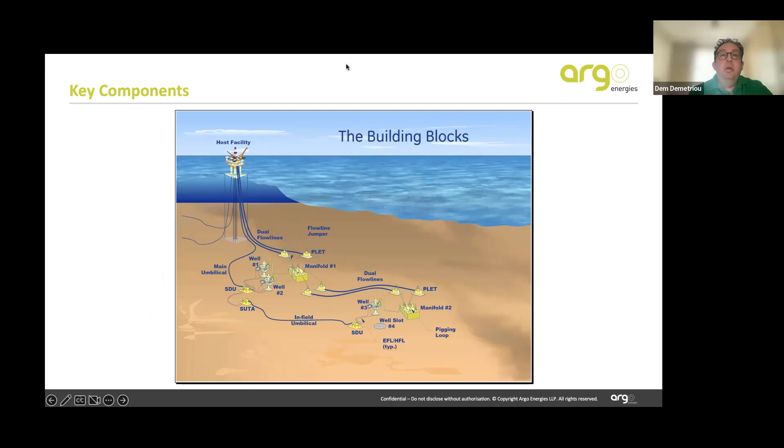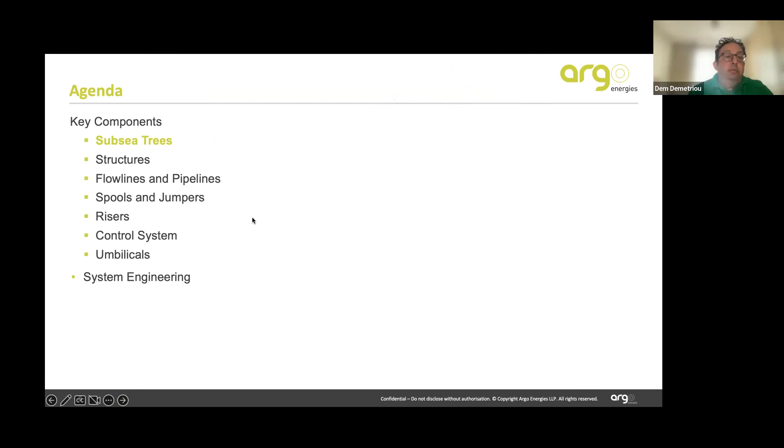So the first component we're going to look at are the subsea trees. The primary function of the subsea tree is to control the production of hydrocarbons, be it oil or gas, and monitor those from the subsea well.

The Christmas tree also allows you to access the well if necessary. It also needs to have injection points for chemicals, such as a corrosion inhibitor, scale inhibitor, or methanol for hydrate inhibition. So all this functionality needs to be accommodated by the Christmas tree. Here you can see a typical Christmas tree with an ROV interface panel, so the ROV can actually access and operate the valves on the Christmas tree from this panel.

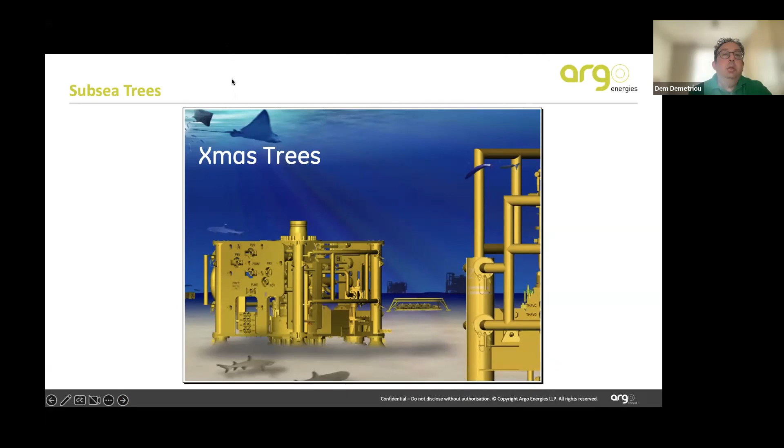Excuse me, Dem, maybe turn off your video because you're breaking up occasionally. Hopefully that'll help with your bandwidth. Not sure, but we'll give it a try. Stop video. Is that better? So far, okay good, sorry about that. That's all right.

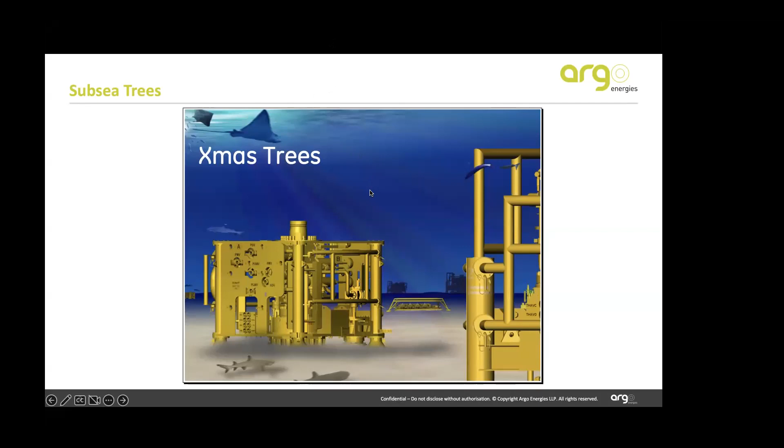So we're going to look at the two main types of Christmas tree: the horizontal Christmas tree and the vertical Christmas tree. The main difference between the trees is the arrangement of the valves. The vertical Christmas tree is the original, developed from land Christmas trees, onshore Christmas trees, so these have all the valves in a vertical arrangement.

If you need to do some kind of maintenance to the tubing hanger or wellhead, you need to access the tree through this bore, using some kind of means of access. The horizontal Christmas trees were developed a little later, and instead of having the valves stacked up vertically, some of the valves are moved horizontally. This allows easier access to the tubing, so you can retrieve the tubing hanger and carry out maintenance on the wells without the valves being in the way, because they're stacked sideways. It's a bit of an operator preference as to which tree is used.

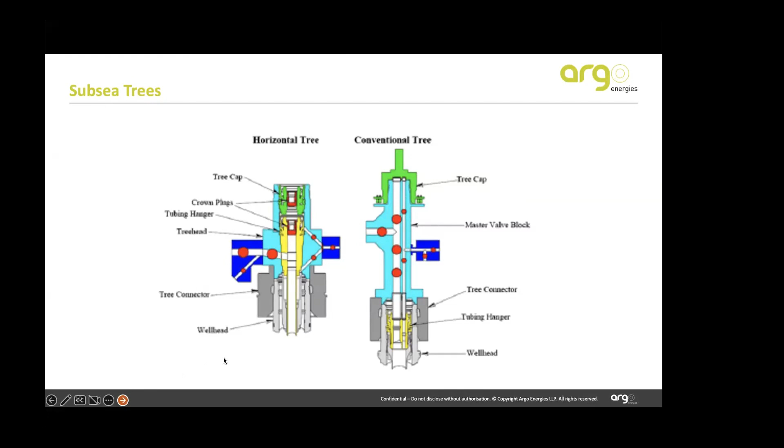Looking at it from a production point of view, a P&ID point of view - this is the same horizontal tree we had before, and this is the P&ID, the process description, to help you understand it a little better. So we'll have some DHPTs, downhole pressure and temperature gauges, which allow us to monitor the well.

SSSV, subsurface safety valve - this is the valve that's set to shut in the well if there are any major operational issues. We have two sides to the Christmas tree: in green we're showing the production side, and in purple is the annulus side. The annulus allows you to have access into the main bore if required.

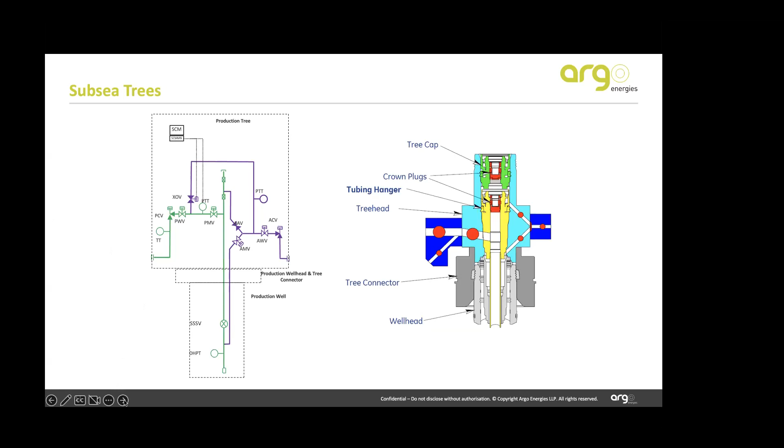So the next component I want to look at are the various subsea structures - we're talking about the various manifold systems. Here you can see this is our well, tied back with a number of wells, to some kind of manifold. A manifold gathers flows from the different wells, to commingle flows if necessary. Sometimes it has pigging functionality to allow round trip pigging, so there may be a pigging loop contained in the manifold.

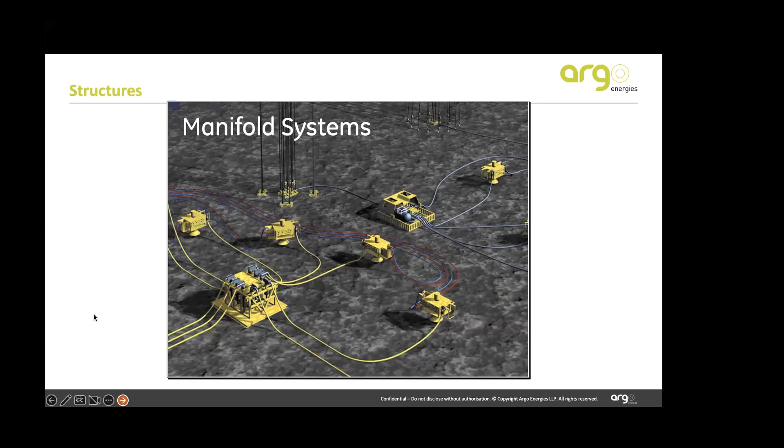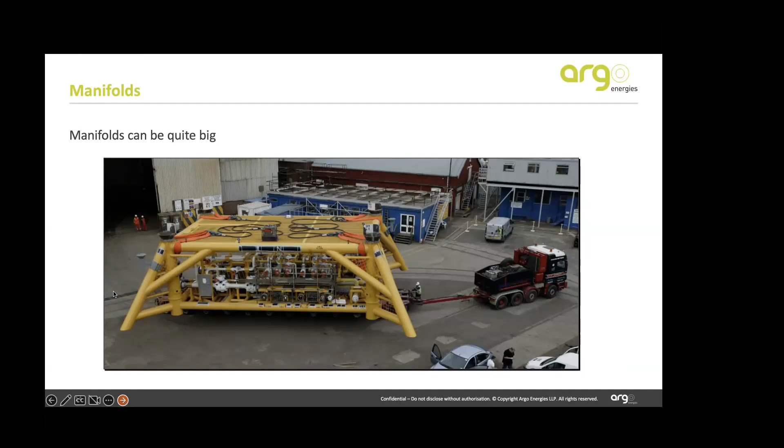Templates are slightly different to manifolds. Templates have the capability to drill through them. The templates are set on the seabed, you drill through the template, and the Christmas trees will be installed within the template as well, and they will have the same...

This is, I believe, the same as this one - this is the Ormen Lange template, which was installed in Norway, in about 900 meters water depth. It's about 1,100 tons, about 44 meters by 33 meters, and about 15 meters high. This is one of the largest templates ever installed - real massive beasts.

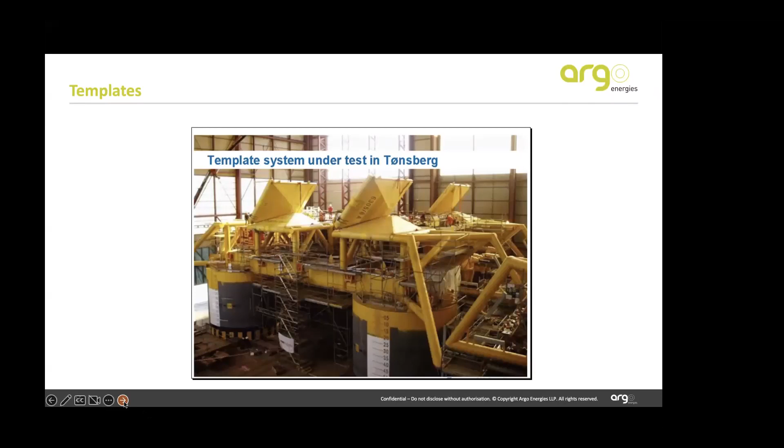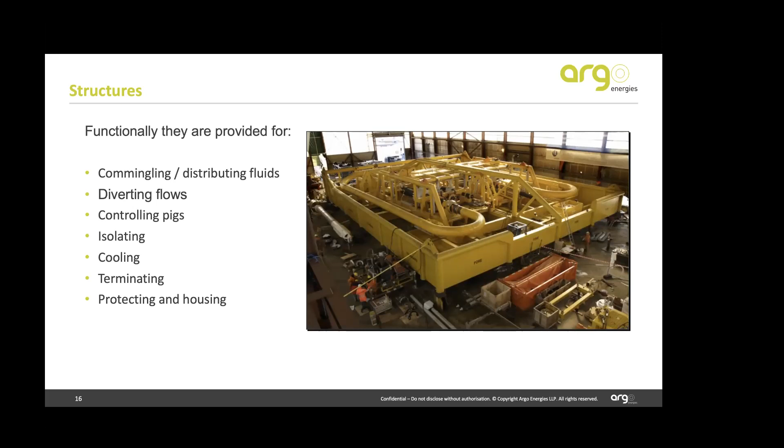The functionality, as I said, is for commingling, distributing fluids, diverting flows, controlling pigs if necessary - here you can see this has a loop that you can potentially use for pigging or recirculating flow. It can also be used for providing isolation, so you can shut off different wells if you have actuated or even manually operated ROV operated valves in the structure. It can be used for cooling the fluids, and also for protection and housing of the Christmas trees.

A bit about terminology - manifolds or templates. Some people get these confused. Templates locate and house wellheads and trees - that's the fundamental difference. A template will include the wellhead and the tree, whereas the manifold won't include the wellhead and the tree.

The templates usually include some manifolding pipework, and they are installed before drilling commences. That gives you some schedule constraints, in that you have to design and build the template before you can start drilling. And as you can see by the size, they often need heavy lift vessels to install them.

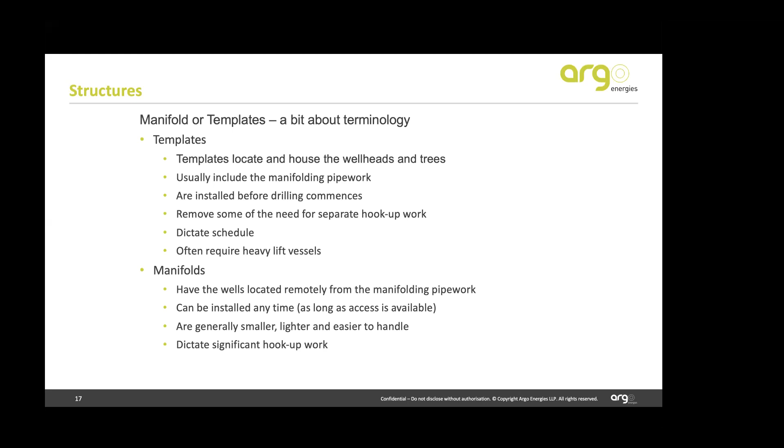Manifolds can be installed at any time. They're generally smaller, lighter, and easy to handle. You can have wells remotely located from the manifold, but the disadvantage is significant hookup work - we have to connect each well to a manifold. So if we're drilling lots of wells from the same location, the template might be a good idea. If we have to drill wells around the field because of the nature of the field, then we have to connect them back to a manifold.

They can be fishing friendly, over-trawlable, or neither. Over-trawlable means that the fishing gear must be allowed to go over and not interfere - this follows the NORSOK Norwegian standard, and should include members that deflect to allow fishing interaction. Flat-sided structures are acceptable where there's no fishing - for example, if you're under an FPSO, there's unlikely to be fishing, so you can have a flat-sided structure.

This is an example of a GFRP protection structure. This actually sits over a tree, I believe, but it gives you an idea of the design necessary for a fishing-friendly or over-trawlable structure.

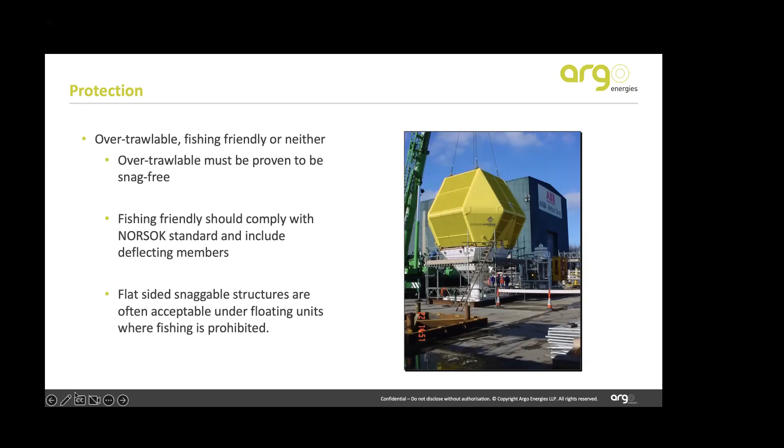Moving on from structures, the next component are our flow lines and pipelines. There's some confusion in terminology, and people use these terms interchangeably. Flow lines or infield lines are between a manifold and a host, or between manifolds, or within the same area. They're typically smaller diameter with multi-phase production, whereas pipelines usually refer to an export line carrying processed fluid, so processed gas or processed oil, usually coming from a platform or facility and going to shore. Sometimes also referred to as a trunk line, but it's not a very big deal - these are just the strict definitions.

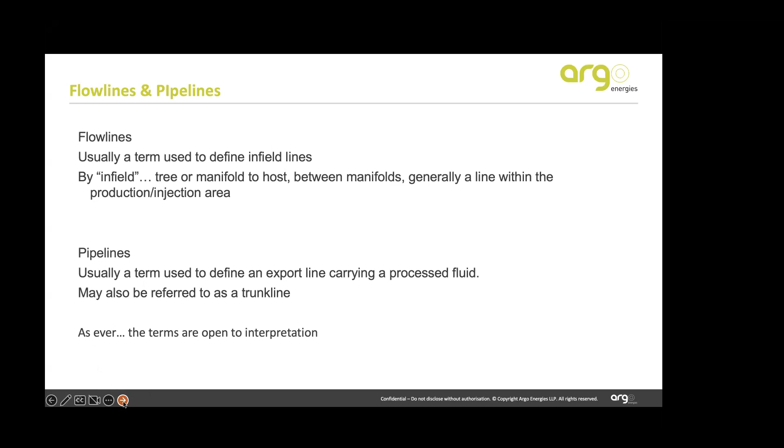Our flow lines or pipelines can be made from a number of different materials and in different configurations. We can have a conventional steel pipe, or we can use clad pipes - this is where we have a carbon steel pipe with a clad layer of corrosion-resistant alloy to improve corrosion resistance and performance. We can also have non-bonded flexible pipes.

This is non-bonded flexible pipe, consisting of a series of different layers - you can see here a wire armor with polyethylene, and then a series of wire armor wound in different directions to give strength in bending and also in pressure containment. Then there's an outer protective sheath, usually in polyethylene or polypropylene or some other suitable material. Non-bonded pipe, or flexible pipe as it's sometimes known, is used quite often.

Disadvantages are they're only available in smaller diameters and have diameter, temperature and water depth limitations depending on the manufacturer. We can install pipe as a piggyback, where we have a smaller diameter line installed strapped to the back of a larger diameter line, or we can also install what's known as bundles.

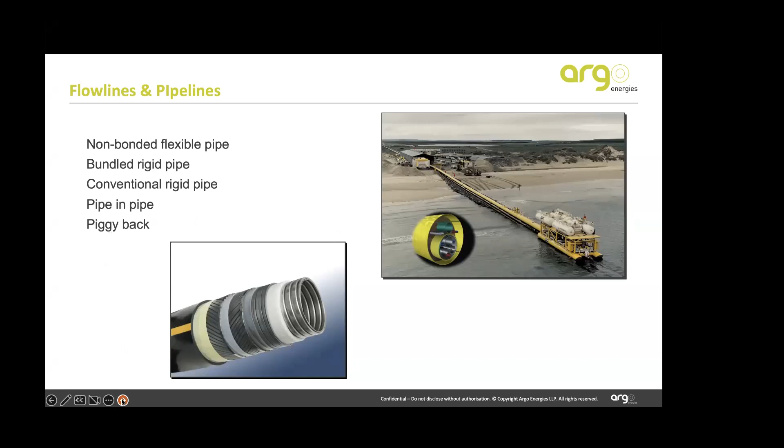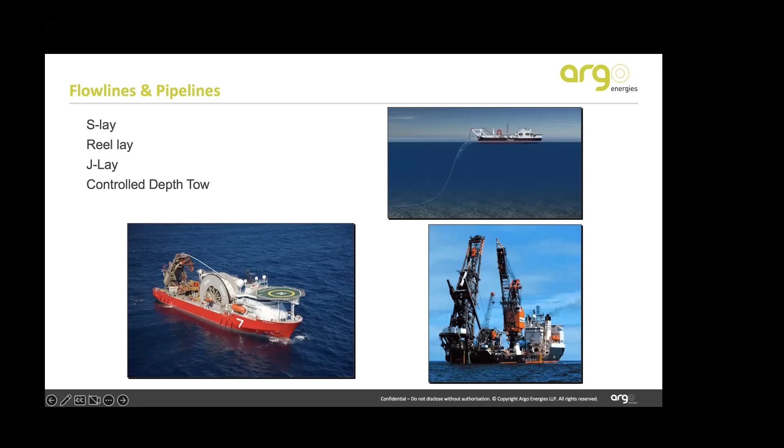Two other acronyms to watch out for: plets and plems. Again, sometimes used interchangeably, but pipeline end terminations and pipeline end manifolds. Pipeline end terminations are installed on the end of the pipeline, as the name implies, and they're usually used for deep water developments, there to host a diverless connector hub. So we need to connect the end of the pipeline to something, and the pipeline end termination will have that connector in place. It's installed during the installation operation as part of the pipeline. It's touched down on the seabed, and then we can use that to connect to the tree or wherever we're going.

The plet is typically very simple, it just has a connector, whereas a plem can be more complicated. It can include connections to other facilities. It might include provision for pre-commissioning activities such as pigging, dewatering, and it's generally installed as an independent structure because it's a bit bigger and a bit heavier. But sometimes, again, these are used interchangeably, so just something to be aware of.

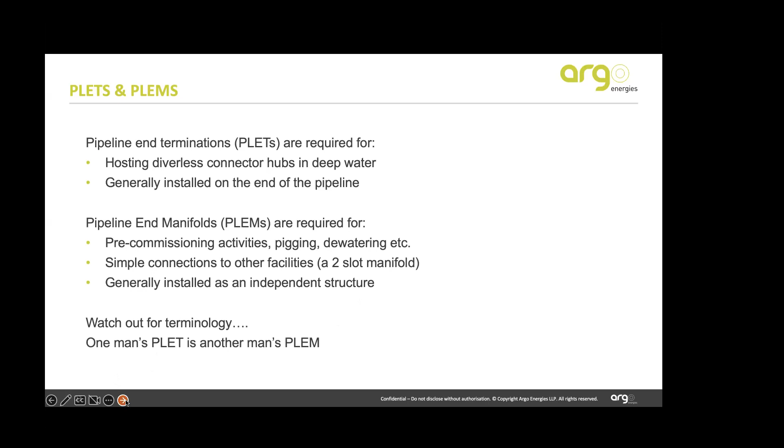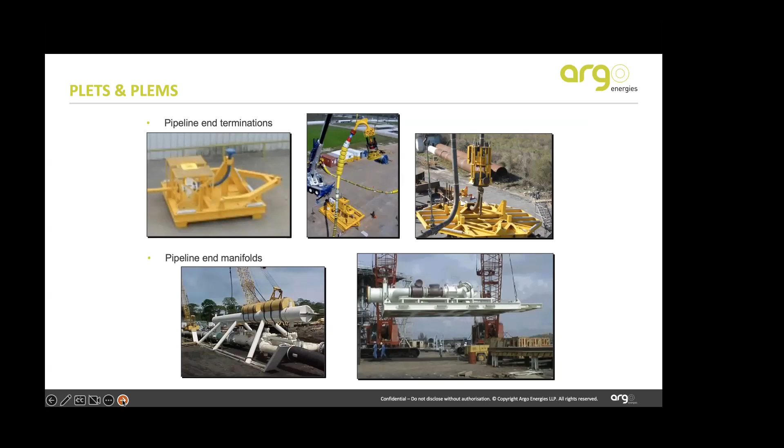So spools and jumpers, very brief. Spools and jumpers basically connect the components together. They can either be diver installed or they can be diverless. Obviously, in deep water, they will be diverless, so that makes things a little bit more complicated in that we have to have these kind of diverless connections.

And then we need to decide whether the spools or jumpers will be vertical or horizontal. They may have odd shapes because they need to accommodate thermal expansion, installation tolerances, misalignments, connector alignments. So they need to be designed to accommodate the various forces we will see, so that they don't transfer loads onto the equipment.

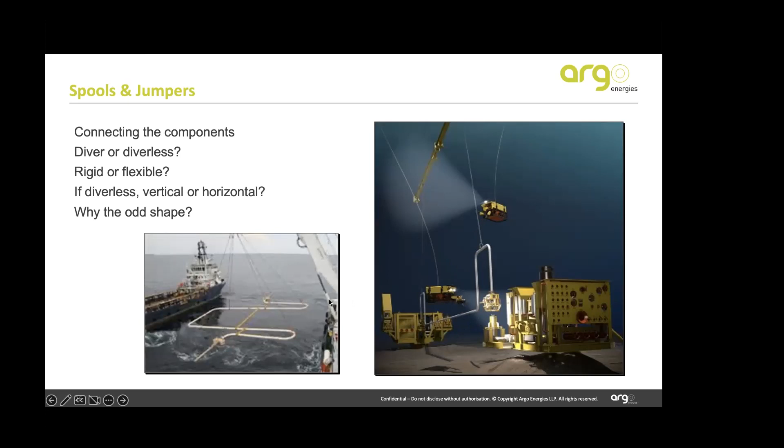Risers, so there are lots and lots of different types of risers. Risers can be rigid, so rigid platform risers. They can be flexible, made with the flexible type that I mentioned before, particularly suited for large diameter deep water FPSO developments, or they can be hybrid risers.

So again, we need to bear this in mind when we're setting out our field layout. Where do we install our end terminations, our riser bases, our flow lines? How do we design this architecture in relation to our wells?

So I'm just going to go and come back.

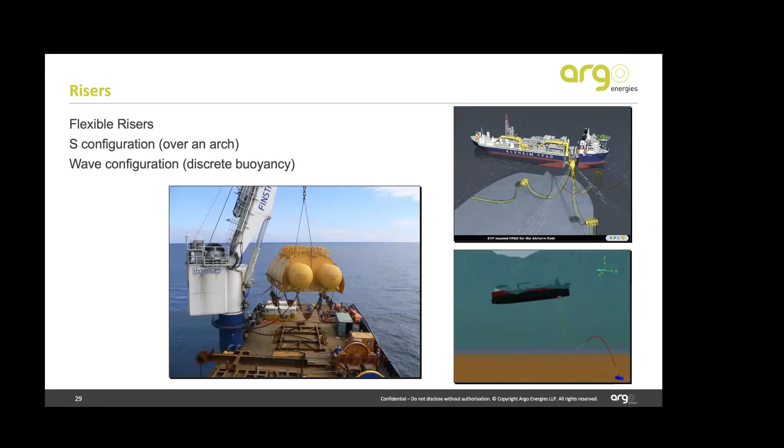So the wave configuration is maintained by having discrete buoyancy elements attached to it. The red section here will be an area where there is some buoyancy attached, so it maintains this configuration. The choice between these kinds of configurations will be dependent on things like water depth, environmental conditions, number of risers, and interaction with neighbouring risers, etc.

Going back to this one, this is a hybrid configuration that was used on the Girasol project in West Africa. This has rigid risers which are tethered to the seabed some distance away from the FPSO, and then from the top of this rigid riser, there's a flexible that connects from there to the FPSO. This is quite a unique hybrid solution that was used in deep water.

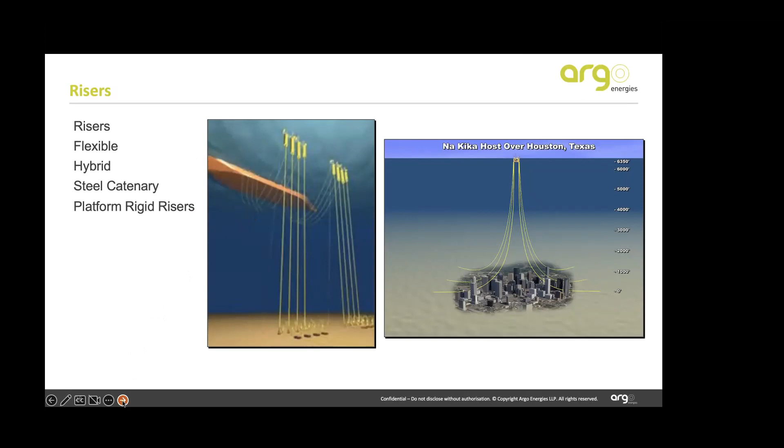Platform risers are reasonably straightforward. If we're building a new platform, we can design the riser and install it during construction of the jacket, and it gets loaded out with the jacket.

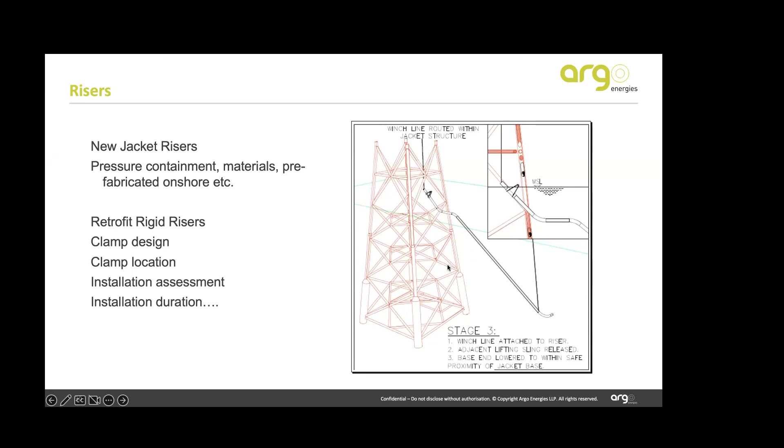The next area to look at is the control system. We've got all this equipment on the seabed, but without a control system, it's kind of effectively dumb. We need to have some way of opening and closing valves on demand, and closing valves in an emergency. If there's some kind of emergency condition, either with our field or an adjacent field, or some issue on the host, then we need to be able to close the valves.

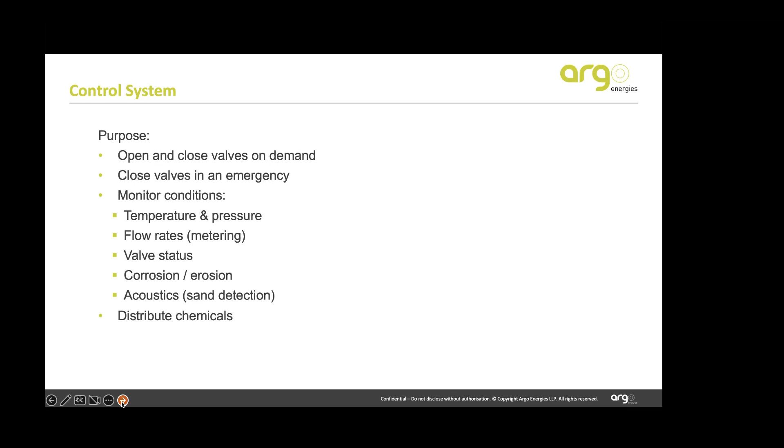We also need to be able to monitor things like pressure, temperature, flow rates, corrosion, erosion, and the status of the valves. The control system also needs to distribute chemicals to the wells or to the flowlines in the field, so it's important that these are designed appropriately. There are lots of different types of control system.

Most modern control systems, most modern fields, have what's known as a multiplex electro-hydraulic control system. We use hydraulics for the valves. This can be used for long lengths, hundreds of kilometers. Umbilicals are small - so even for quite a complex system, the umbilical diameter might be maybe 6, 8, 10-inch diameter, so not really a very large size.

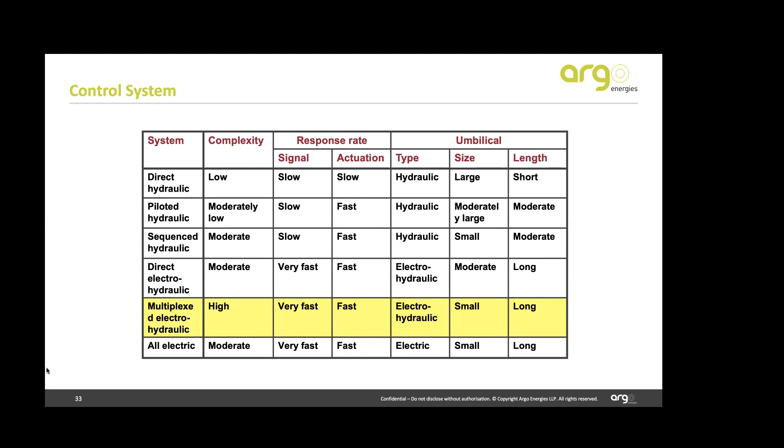There are lots of other components of the subsea control system. Some of those components are on the topsides, on the host. You will typically have a hydraulic power unit and an electrical power unit, providing, as the names imply, hydraulic and electrical power to the system. There'll also be an MCS, the master control station - a computer terminal in the control room. These are all interfaced to a topsides junction box, sometimes known as a topsides umbilical termination assembly or topsides umbilical termination unit, TUTA or TUTU are the names you might hear.

From the topsides junction box, the electro-hydraulic control umbilical is connected to the subsea umbilical termination, or subsea distribution unit, as we saw earlier. The cores are split out, so the electrical and the hydraulics are split. We connect these to a subsea control module, SCM, which sits on a mounting base, sometimes, not always. And in there is an SEM, subsea electronics module - this is the electronic brains.

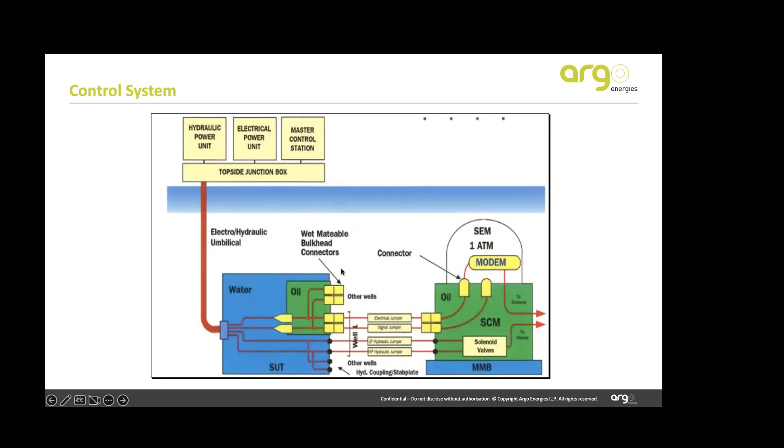So just to finish up, looking at the umbilical. The umbilical links up all the control system components. It distributes hydraulic fluid, transfers power and signal, and supplies chemicals for injection.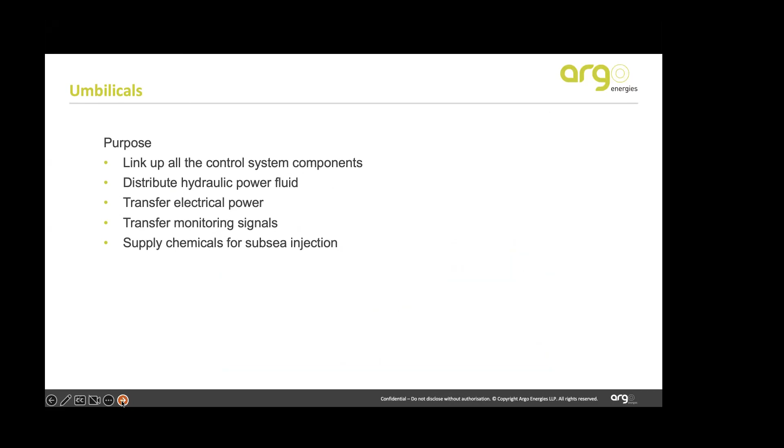Here's a typical cross-section of an umbilical. So what can we see here? Umbilicals can either have thermoplastic hoses or steel tubes within them. Typically, steel tubes are used for deeper water applications because of their better resistance to external pressure.

Here you can see the various hoses within there. These are the main hoses. You've got some other hoses here, and you can also see the electrical cores here.

Typically we'll have high pressure and low pressure hydraulics with dual redundancy. We'll have electronic, copper, and fiber optics within the umbilicals recently. So you've got these cores. Sometimes they'll have fillers within there made of lead or some other material to add weight.

And then we've got this armoring around here to give resistance and strength. Finally, an outer sheath of something like polyethylene to provide mechanical handling resistance. Quite often we'll have some spare cores within the umbilical as well to make sure that if something is damaged, we can carry on operating.

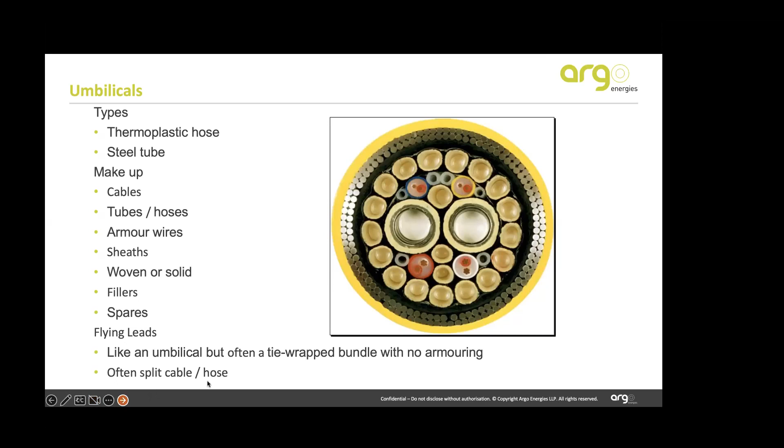For umbilical installation, we can either, as with reel lay, take them out on a large reel to site and install them, or for larger diameter umbilicals, use a vessel that has a carousel. A reel is a vertical hub, whereas a carousel is horizontal, usually within the hold of a ship, so you can take a lot longer lengths.

Typically you might want to bury your umbilicals, so you can install them within a pre-cut trench, or in some cases simultaneously lay and trench them, over-boarded in a basket as you can see here, and then pulled into place using either a diver or an ROV.

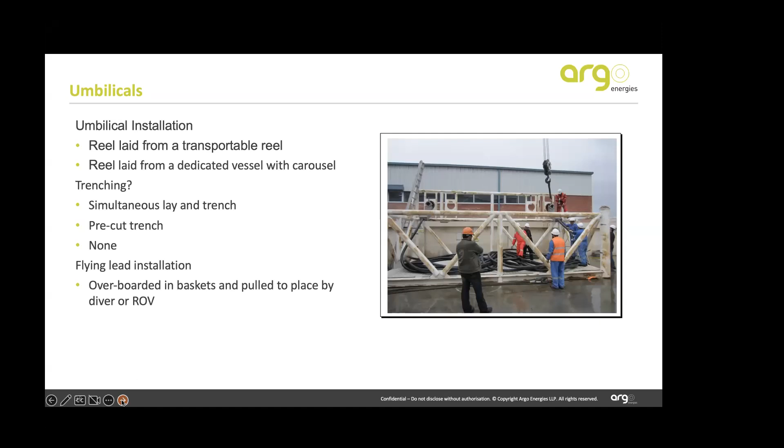These are examples of the TUTUs, the topsides umbilical termination units, these two here. You can see it just brings all the cores of the umbilical together, a different type of combination here.

This is a subsea umbilical termination unit. Again, it terminates all the various hoses and allows for distribution going onwards.

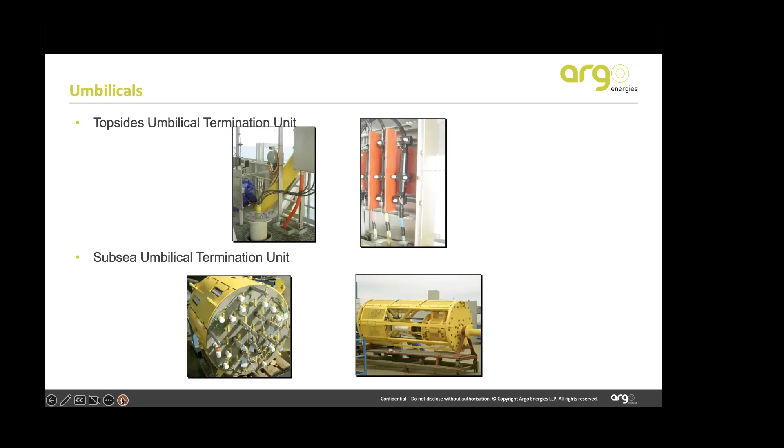These are the subsea distribution units. So if we've got a single umbilical and we want to connect it to a number of different fields or different wells, then we can have these distribution units. Effectively, you can think of them as a junction box. You'll have the main umbilical coming in on one side, and you'll have power, hydraulics, comms, or chemicals being sent off in a different direction.

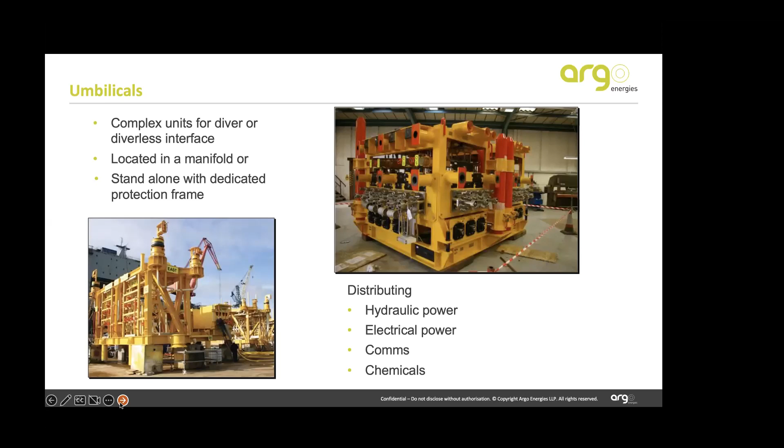I just want to finish up touching a little bit on system engineering. We have all these building blocks, and the real art, should I say, is combining these building blocks together in the most efficient way. As always, there's more than one way to design a field or lay things out, and it really depends on the individual circumstances.

When we're starting off designing, do we use manifolds or templates? Where are the top hole well locations? Do we need to test the wells? Do we need round trip pigging? How do we route the pipelines to where they're going? What size do the lines need to be to make sure we have sufficient pressure? Do we need to inject chemicals? Where do we need to inject chemicals? How do we provide for those chemicals? It really is wise to take a holistic approach to this subsea field architecture.

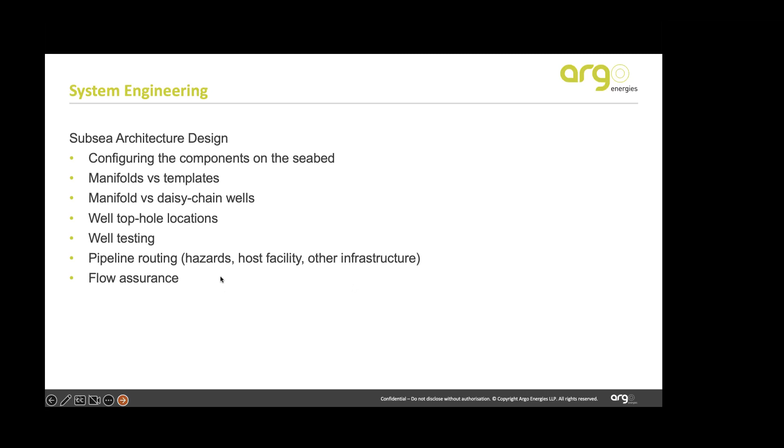So the overall system design, and just putting together this little graphic of some of the things that you need to think about, provides input into the decision making to come up with the overall system design.

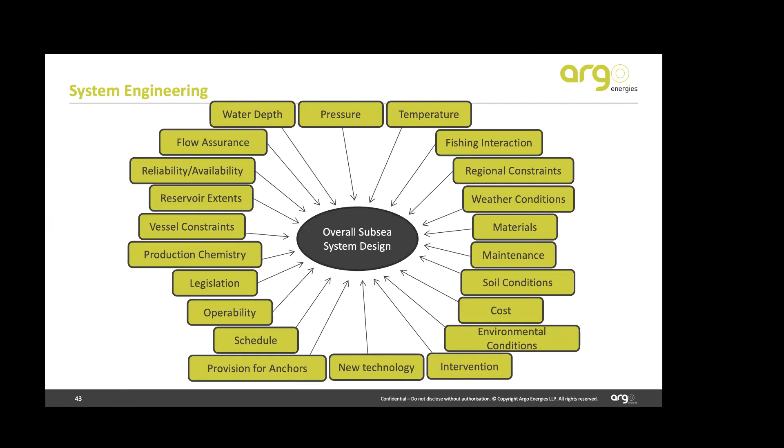So that's it. That's been a very quick introduction to subsea umbilicals, risers, and flow lines. If you have any specific questions, I'll be happy to take them.